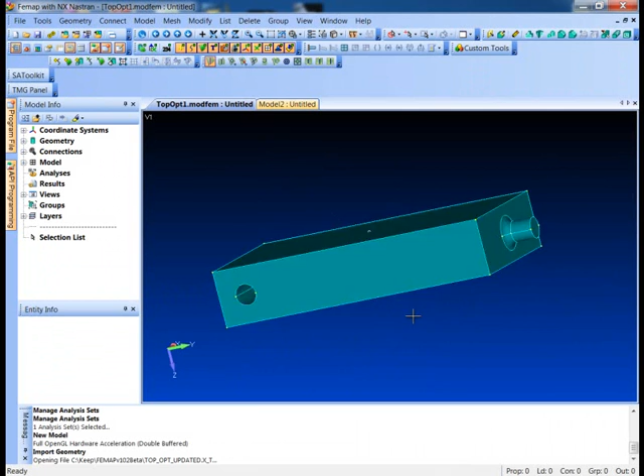I'd like to walk through a little example of using the new topology optimization module in FEMAP version 10.2. I've got this part here that kind of represents the outer volume for a little torque linkage. We're going to let the topology optimizer determine what shape we should actually make this part.

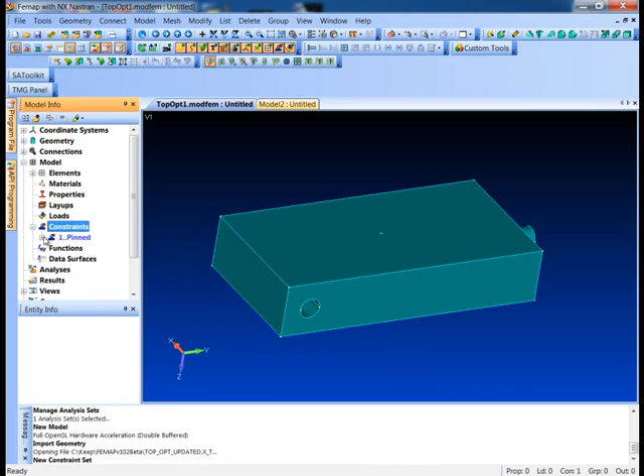So first thing we'll do, it's a regular finite element model, so we're just going to take this piece and apply some constraints. What I'm going to do is just pin through the holes here and on the boss on the end where the torque load's actually going to get applied. So I'm going to go in here and just create a new constraint definition on surfaces and pick

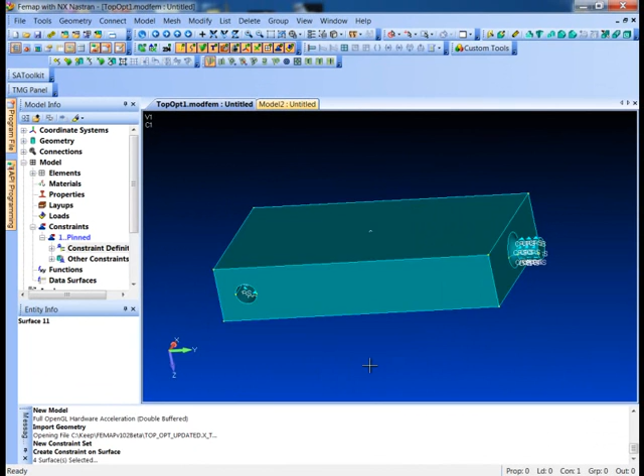basically the circular surfaces here, and we'll set those up so we won't let them grow radially, and we won't let them slide. So basically these are just going to allow them to rotate around their axes. So there's our constraints, and let's go ahead and throw a load on here too.

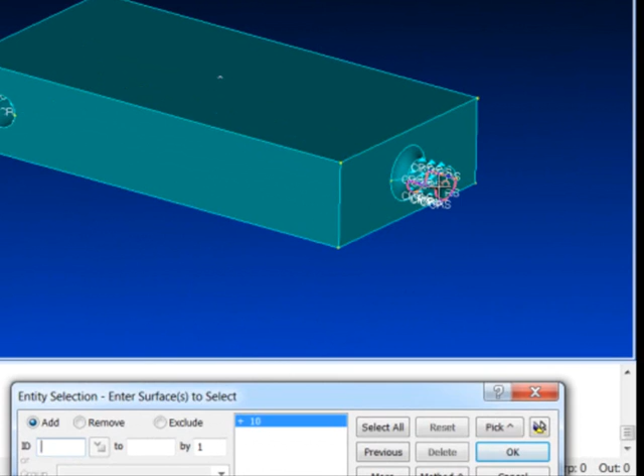I'll say new, and I'll call this positive torque. What we're going to do is open up the load definition, create a new load definition on a surface, and we'll apply our torque load right there. I'll do a new; this is actually a torque load we added just a couple of releases ago in FEMAP, but we'll do 250 inch-pounds, and I'll say OK, and it asks me for a vector.

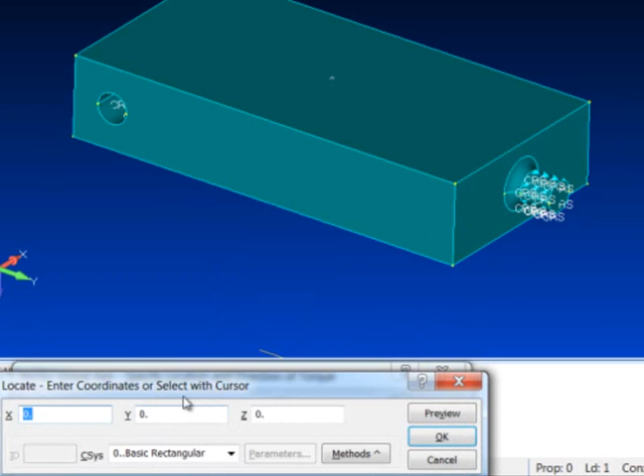What I want to do is a global Y vector, and then I want to pick the center of that surface. So I can hit Control F, which brings up the standard coordinate box that has a method that's the CG of a surface. So I'll pick the CG of that surface there. It fills it in for me. I can do a preview and say, yep, that's the right vector. And I've applied my torque.

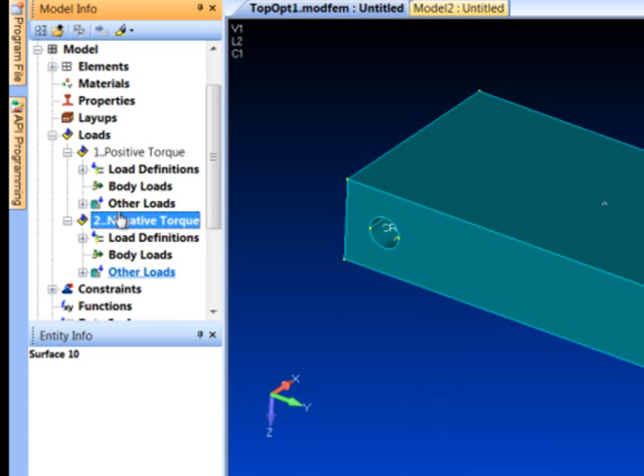Nice thing we can do here now is I'll just copy this to another new load set. And I'll just do a little renaming work and call it negative torque. And then I'll go in and just edit the load definition. That's just a copy of the other one. Edit the load, and I'll just make it a minus 250, and this will give me the opposite direction.

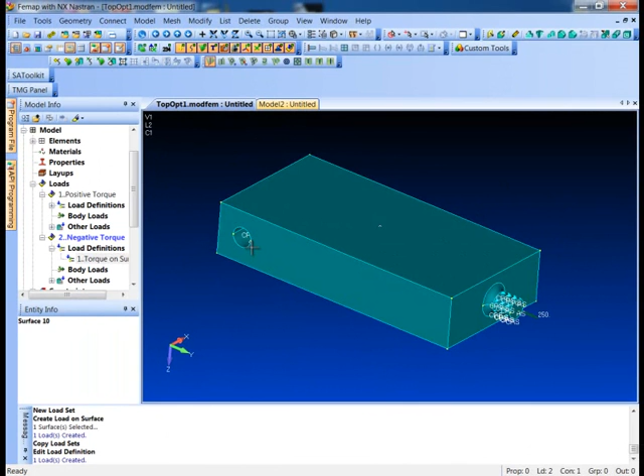You do want to be careful when you're using topology optimization that you include all the load sets that your part might see. If you don't consider all the load sets, you could get some shapes that probably wouldn't be optimum for some other type of loading, so you want to get them all in here. Since this is a torque thing, it's just going to twist one way or the other. Let's go ahead and mesh this.

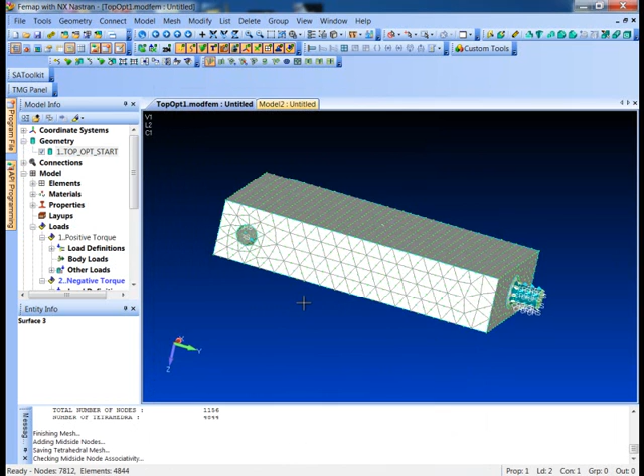I'll just open up my geometry, pick my one part and say mesh, and we'll just make it out of aluminum. Say OK, and just let the mesher fly. So now we've got our model ready to go. I'm just going to go ahead and save it and set up the analysis. This is just like setting up any other analysis in FEMAP.

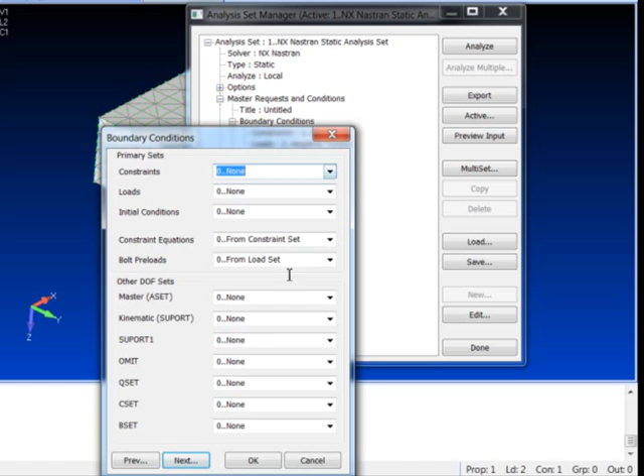We are optimizing here for the torque loading, so we do want to set up both of those load cases. By default we get just the current active one, so I'm going to turn off the master load cases and use our multi-set to create subcases for the one constraint set we have and all the load sets we have. And I'm also going to set up our topology optimization run. So I just want to say yes, we're topology optimizing.

I'm going to include all elements. You could actually include just a group of elements and only optimize in a certain area, but we want to go ahead and optimize the whole thing. And I'm going to try to take out 50% of the mass. I'll set that as my goal. And we are trying to maximize stiffness and reduce volume.

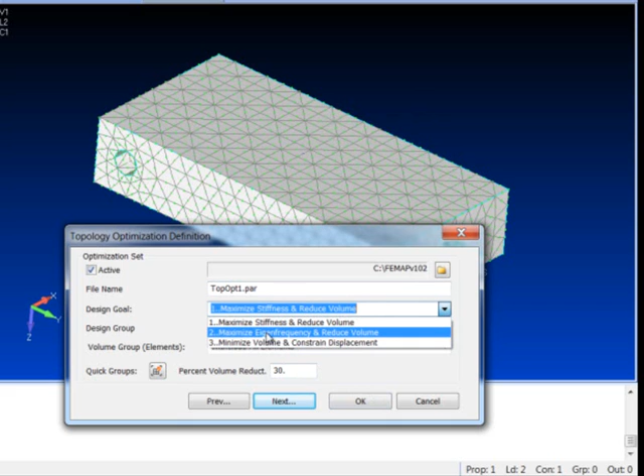There's also, for frequency or modal runs, the option to optimize for a maximum frequency and stiffen your part while reducing volume, or actually set up a volume constraint with a maximum displacement. But here we just want to make it as stiff as we can and reduce volume. Actually, did I lose my 50% there?

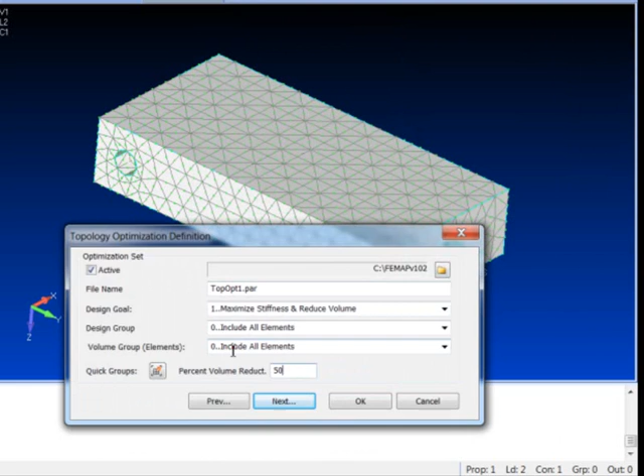Let's make sure. We could freeze groups, do some wall thickness things, set up some casting directions. But in this case, I think we're just pretty much going to let it go and let it run.

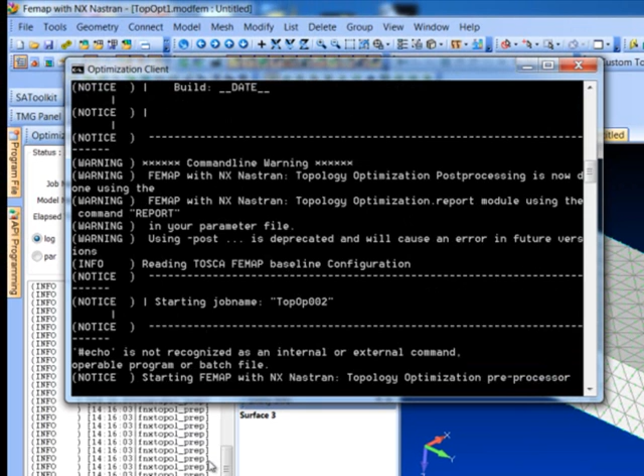Alright, let's go ahead and run this now. Hit the Analyze button. What this will do is spark off the analysis. This actually runs Nastran multiple times, looking at the results of each run and basically doing some work on the stiffnesses of the elements and carving away parts of the part.

We can actually watch the design objective change. After 2 runs of Nastran on this part, we should start seeing some changes. The stiffness will show up and the volume constraint. The volume's already been dropped down to 82% of original. The design objective, the maximum stiffness, which the full part was this, is basically keeping the part almost as stiff as it was.

We'll just let this keep running here. It's already through 3 iterations. I may actually edit the video and carve out some of these so you don't have to watch them, but it's not going to take too long here. You can see it's progressing along nicely.

Design objective is still maintained real well. We're still at 99.5% of the original stiffness. The volume's down to 63%. Remember, we're shooting for 50% reduction, so we'll just let this run.

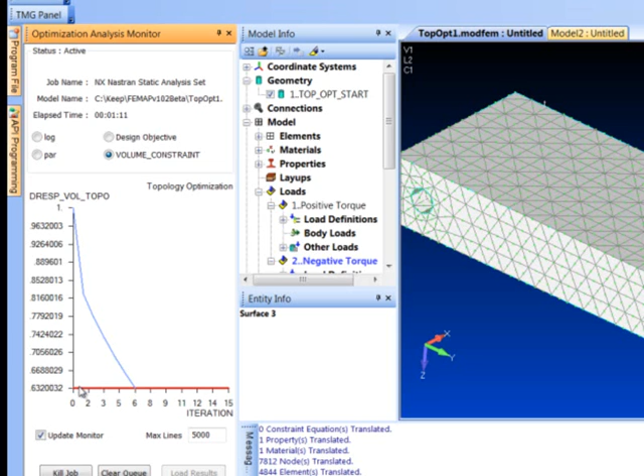Alright, the model's done here. We can see that our volume constraint was met with pretty much a 50% reduction in the volume of the object. And the stiffness stayed right up there at 98.9%, so our model's pretty much as stiff as it was. I'm going to go ahead and shut this down.

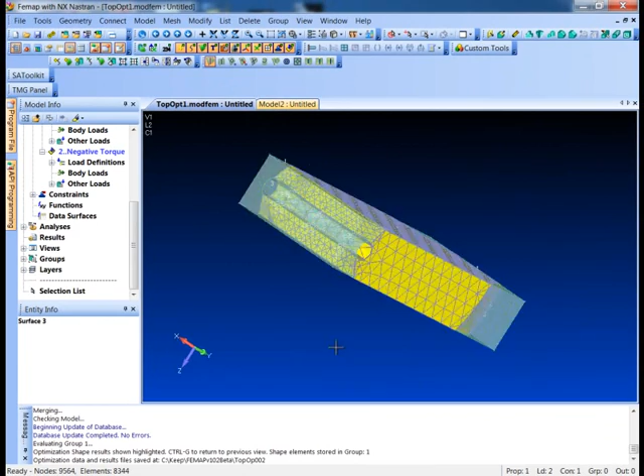Now, the topology optimization, you got to remember, this is pretty much a recommendation for a design modification that will remove some mass from your part. So obviously the lugs here, we're not going to take them completely away. That just doesn't make any sense. But it looks like the middle here, we can certainly get away with it.

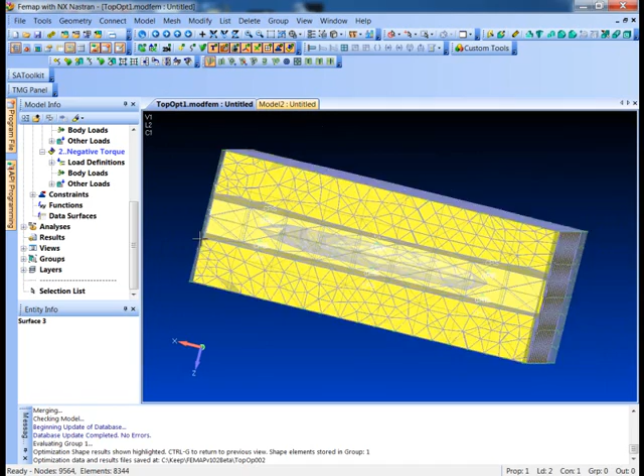And if you look up the inside here, you'll notice, let me turn off all the geometry, so we just have the mesh here. You notice it actually started carving in up the middle. So it's actually suggesting to me design modifications should be to basically hollow this piece out, take off some of the edges here, and leave the rest of the part.

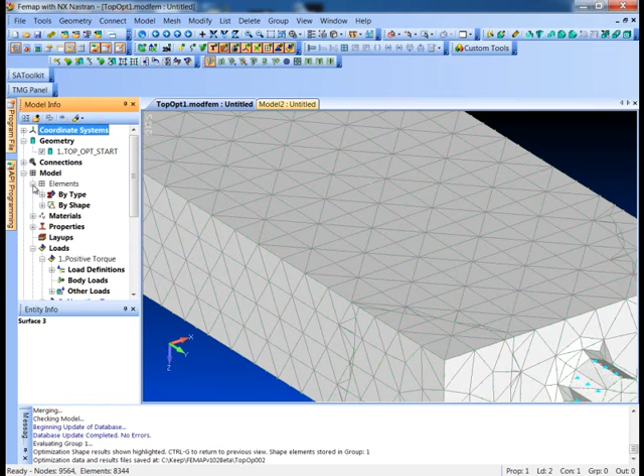So what we've done is we brought in, these are plot-only elements in FEMAP. They're just highlighted right now, so I'll go ahead and redraw the display. But we can use some of the visualization tools in FEMAP. I'm just going to turn off the original solid elements, looking at just the resulting topology optimized mesh or shape, and go into a wireframe view, and you can see that it's showing us how to carve this out up the middle.

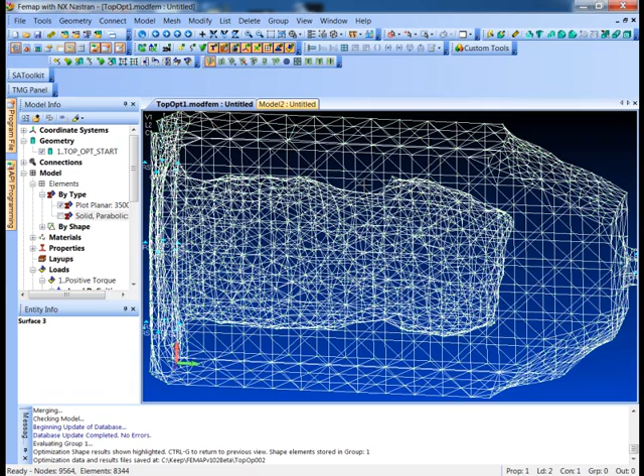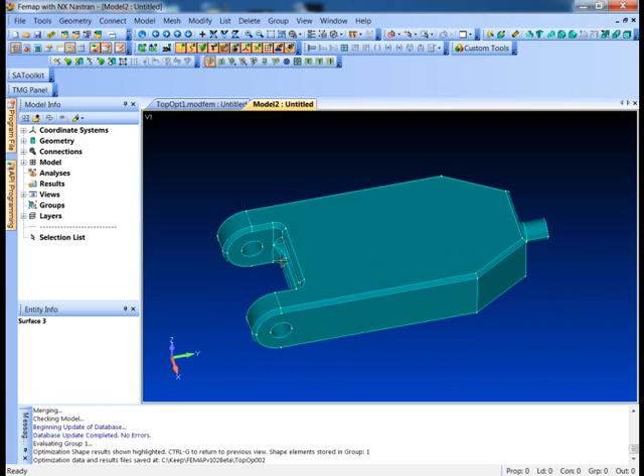Now, obviously this is a pretty free-form shape. It doesn't make a lot of sense for design, but what I did is, I've already run this once, but I used these results to bring in and edit the geometry to kind of come up with a better shape. So this is kind of what you might do with the results here: it's telling me to hollow it out the middle, carve off the edges. A bunch of material here really wasn't needed, so my volume can be reduced a lot.

We'll just do a little geometry check here. Let me turn my surfaces back on, go into a solid view. We can just do a quick mass properties on our solid here, and I can pick that solid and say OK, and I'm just going to put in the density as 0.283. So it tells me I got a total mass of 27.8.

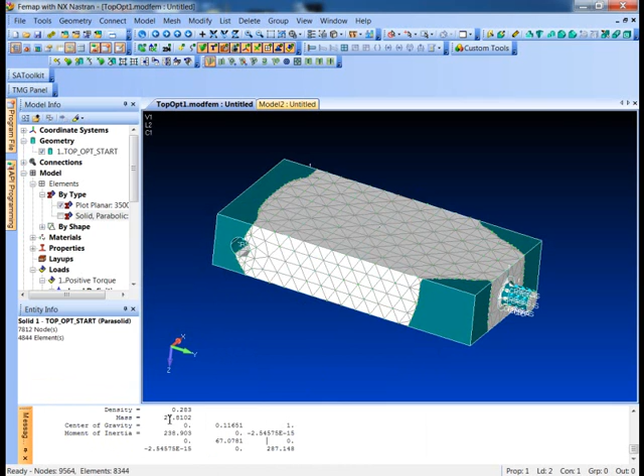I can pop over my other model, do the same thing. So here's my reduced design. Solids, pick him. Don't need a node, we're not modeling that right now. 0.283. You can see here we got a pretty nice reduction in overall volume, from mass from 27.8 to 18.4.

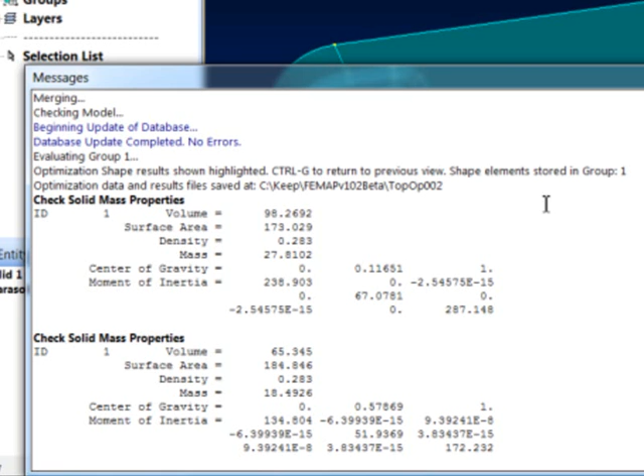And you remember the stiffness really wasn't affected that much. So it's a fantastic tool for helping you optimize the shape of a design.